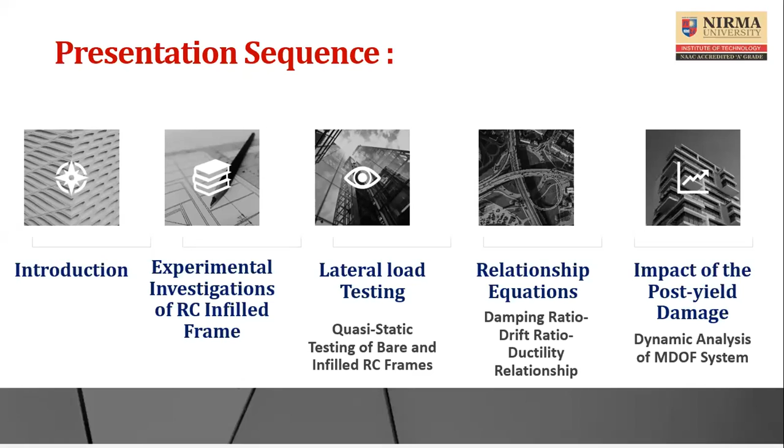And then at last, we will take whatever outcome we have got from this experimental investigation and try to fit it into the dynamic analysis or seismic analysis of a multi-degree of freedom system, wherein I will show you how we have incorporated the various properties or states of the masonry infill, before yield and after yield, and how they affect the overall seismic analysis of any reinforced concrete building.

As we are aware, the structural material most widely used in civil engineering structures, as we see all around, is reinforced concrete buildings. They hold majority of the stake as far as civil engineering construction is concerned, followed by structural steel. Of course, structural steel is still not very pronounced in some sectors of civil engineering construction like official buildings or residential buildings. But most of our stake is probably because of reinforced concrete structures.

And whether it is reinforced concrete or steel structure, worldwide, such kind of framework is later non-integrally built with masonry infills, and that masonry material can be random rubble stone, which is now a little bit obsolete, but still in practice for a very specific purpose, when someone wants to go exclusively for random rubble stone for different reasons. Then there's red clay bricks, which is a very common feature of reinforced concrete typology practiced all across the world.

And recently we have seen variation into masonry infill in terms of AAC blocks as well as fly ash bricks, in order to navigate waste material into a useful form for civil engineering. So fly ash bricks have also come up, and most recently you find that both are being rapidly replaced by AAC blocks. Of course, we will discuss that a little bit later in the discussion.

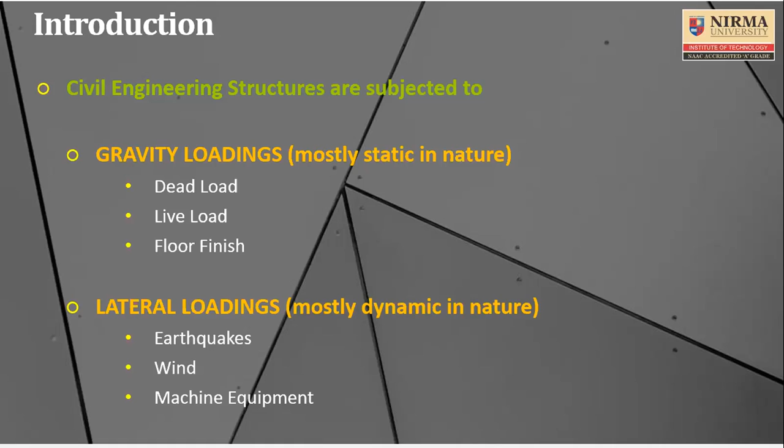Therefore it becomes very important that this lateral loading, which causes a lot of demand on structures, needs to be safely resisted when you construct, design, or analyze any structural system. You need sufficient methods to tackle all such forces, whether gravity or lateral.

As you are aware, in structural engineering we have an envelope of methods to calculate, determine, or assess the performance of any structural system. These can essentially be bifurcated into two: one can analyze and design the structure using analytical methods, and the other, much more important part, on which the analytical method depends, is what we call experimental investigation.

Most of the time we understand the basic behavior of the structural framework system through experimental investigation, and through that we try to develop methods considering either the static form of loading or the dynamic form of loading.

Analytically, we can typically bifurcate any analysis into two parts: static and dynamic analysis. Once you consider the material or structural element to be within the elastic limit, you can call it linear analysis, so it can be linear static or linear dynamic. Once you try to analyze the system with its capacity beyond the limit of elasticity, also called the post-yield region, trying to understand the behavior of any system beyond the yield capability of the material or the structural and geometrical form itself, then it requires non-linear analysis.

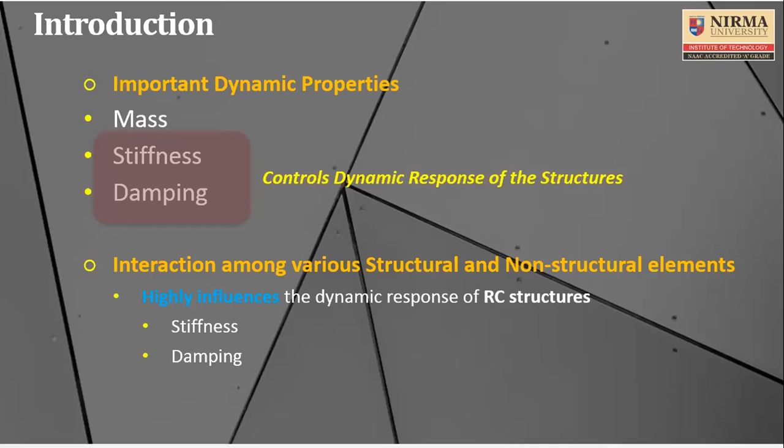The most important parameters responsible for influencing such interactions when you create an infill into the reinforced concrete frame or a steel frame are the stiffness property of that infill, as well as its damping capabilities. Therefore, most of the time we focus our experimental investigations on two important properties highly influencing the behavior of masonry infill on the dynamic response of overall RC infilled structures: stiffness and damping. That is what we are also going to discuss in times to come.

The presence of infill alters the behavior of reinforced concrete frame under lateral loading, because under this lateral loading the infill will undergo different stages. Starting from a low level of lateral loading, it will mostly remain in an undamaged state. When it is in an undamaged state, it will impart a lot of stiffness, as we are going to prove a little later through experimental investigation—undamaged state always offers a maximum stiffness of the infill. Because of that, the lateral load resisting capability of such an infilled reinforced concrete frame is huge as compared to a bare frame where you don't have infill.

Then with the increment in lateral loading, because most of the masonry material that we use is brittle in nature—typically bound by various elements and heterogeneous in nature—despite being connected with a higher bond and higher strength of the binding material, it will try to undergo damage at different degrees.

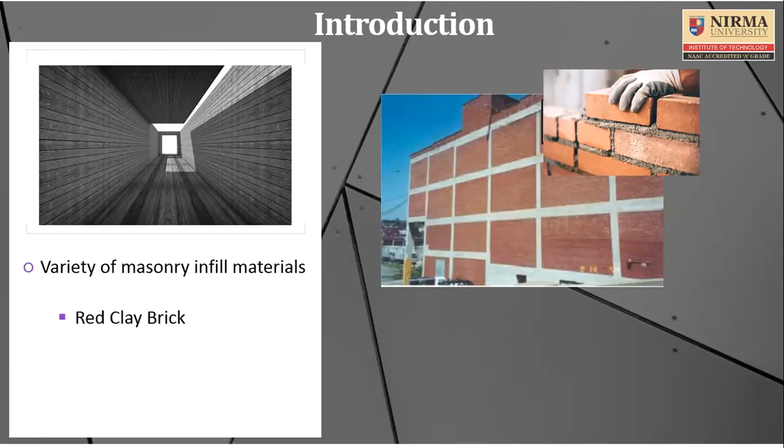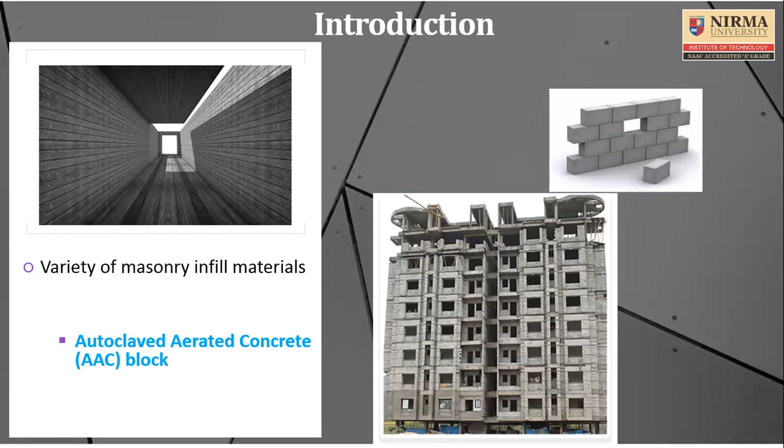Therefore we have been utilizing red clay bricks for centuries together. But now, slowly and gradually, we are steadily replacing red clay brick with a much more lightweight material of a bigger size, which increases the speed of construction by a huge margin—what we call autoclaved aerated concrete blocks, typically known as AAC blocks, which you find nowadays very much in practice.

There is also an alternative to red clay brick, which is called fly ash brick. As you know, India generates huge waste from fly ash through thermal power plants, and there is a lot of concern about disposing of this fly ash. One way to dispose of it is to make bricks out of it.

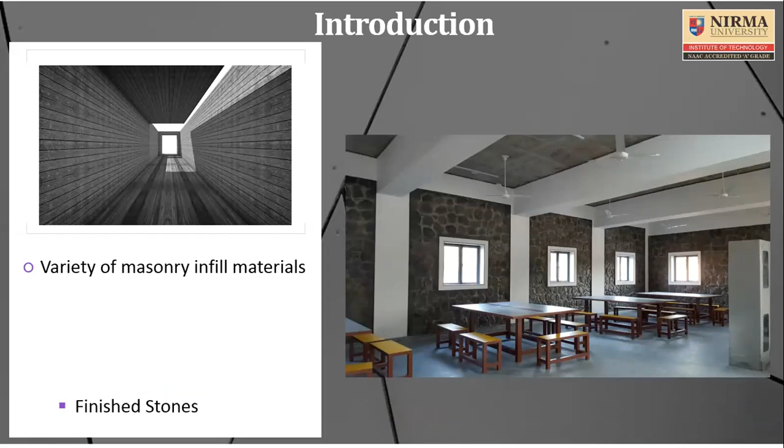The fourth one, which is still in practice but very rare, mostly used from an architectural point of view, is the heaviest dead weight material, which is finished stone. As you can see, it looks very beautiful, but many times this increases the dead weight of the structure by a huge margin, and under lateral loading they are still vulnerable.

Nowadays you will find that this natural stone is also replaced by artificial stone, or other types of stones like marble or other artificial stones, which are still heavy in weight, and therefore they are still used, but of course it has its own demerits in terms of lateral loading.

Therefore you have to understand that when we use such systems in our day-to-day life, one thing is very clear: because of their varied material properties, their behavior under lateral loading is likely to be different, and therefore it becomes a very interesting domain in seismic analysis and design or earthquake engineering, to understand the behavior of such infill and its impact on seismic analysis of the structure.

As you are aware, so far whenever we try to analyze any multi-story building infilled with any type of masonry, most of the time we treat them as within elastic limit, and mostly we employ a modal analysis typically well within elastic limit. Therefore the analysis we take up to carry out or understand and design such RC infilled multi-story buildings is well within an elastic limit.

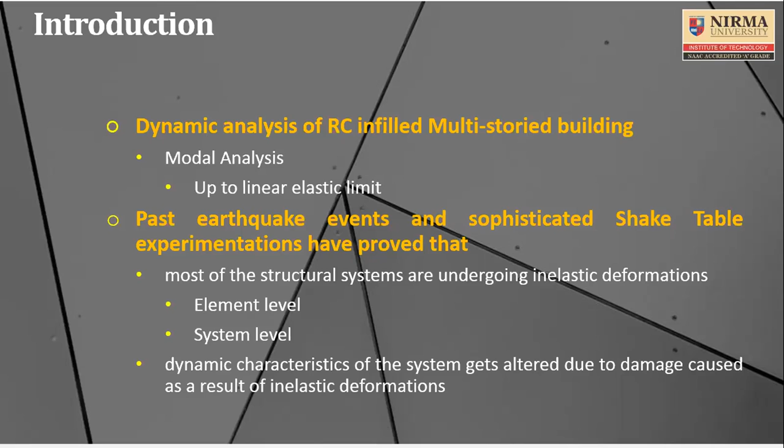As we know, damage always changes the dynamic characteristic of the system, and that dynamic characteristic gets altered immediately when there is damage caused by inelastic deformation. So we must understand the capability of such infills to undergo inelastic deformation, and because of this they are likely to undergo damage, and because they undergo damage, they're likely to change their dynamic characteristic, which will heavily impact the seismic analysis of the structure, and this must be taken into account in our seismic analysis and design.

Therefore it becomes very important, and it has become an active area of research, where we try to understand the impact of various types of infill on a reinforced concrete frame.

In order to understand them better, various research studies have already been conducted, and most of this research has been conducted over more than a decade of time. In fact this area of research has been active for maybe the last two decades, 20 years or so, and out of these 20 years, the last 15 years have been very instrumental as far as these studies are concerned.

The majority of these studies focus on some important parameters, which includes the type of masonry, like the material property - red clay brick has a different material property, fly ash has an altogether different property, and obviously AAC blocks and stone as well.

The construction methodology can also have an effect. So either you build the reinforced frame after putting up the RC infill, or once you create the reinforced concrete framework, you then non-integrally build the infill into the RC frame. So all this construction methodology also has a lot of impact.

In fact, recently some new construction methodology has also been witnessed, wherein people intentionally keep a gap between the infill and the RC frame, in order to safeguard the basic structural element. So that also you are able to see nowadays.

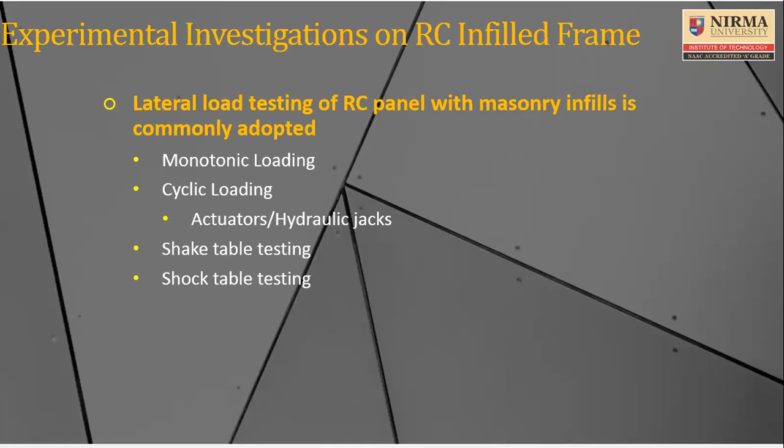Therefore, to simulate this, the most common way of preparing any test specimen is such that the bottom size of the beam is quite huge. But as you can understand looking at the size itself, they are very bulky, and you require very good infrastructure to handle them, and you must handle them very carefully. This becomes an otherwise heavy structure.

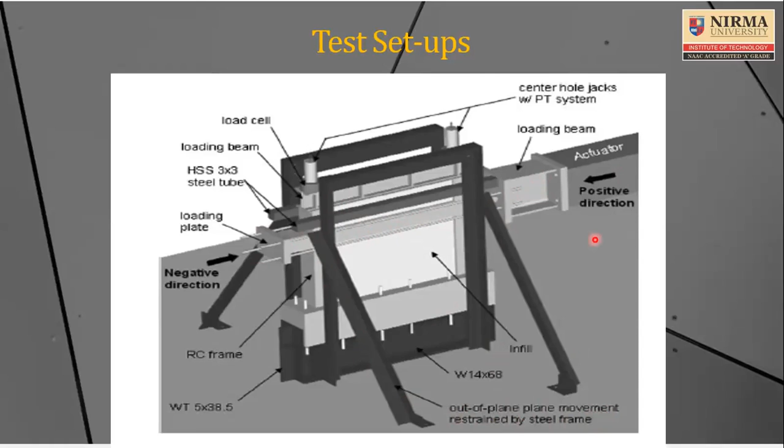As it is a two-dimensional element, when you apply this lateral load, it is likely to undergo out-of-plane movement. To safeguard against out-of-plane failure, you must restrict out-of-plane movement of this RC frame, which can be done by an additional framework. These two inclined supports supporting this horizontal girder restrain the out-of-plane movement using the steel frame. So you have to think of all these things before you go to the laboratory and develop the test specimen.

As you can see, there is a strong ground floor where the base of this test specimen is firmly connected with the strong floor. The load is applied through an actuator, and there are load cells in vertical directions to measure vertical load.

Therefore, you require a pair of strain gauges in the beam as well as column elements. Because this actuator applies reversible loading, at one time these strain gauges may be subjected to tensile stresses, and at other times the same sensor will be subjected to compressive strain. This proves that under lateral loading, the beam or column is subjected to reversible stresses or reversible deformation.

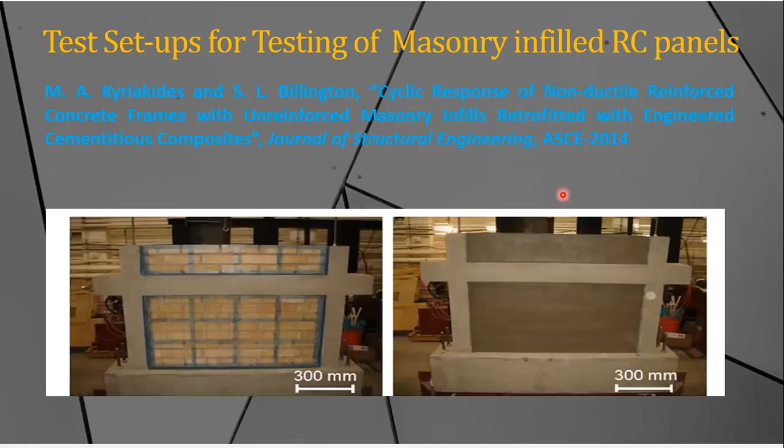This is another work, and as compared to the previous three literatures, this helps understand the fourth important element. As I narrated earlier, these are masonry type or construction methods, and this one is masonry with opening. Ingham and co-authors tested their infill panel with an opening.

To understand the effect of opening on the lateral load behavior of the masonry infill panel, they provided a central opening and different types of openings.

This is one of them, and again the typical test setup is very similar. You can see, in order to understand the pier behavior or rocking behavior of this masonry, because when you have an opening, it is found that the masonry adjoining to the opening is likely to act in a rocking behavior.

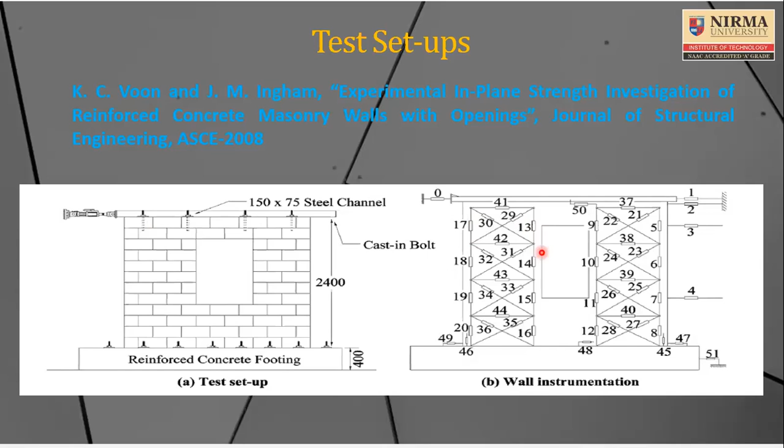In order to capture that rocking behavior, they used a number of diagonal lateral displacement sensors, as well as vertical displacement sensors, so that they can capture the behavior very well. So these are some of the physical ways to understand the behavior.

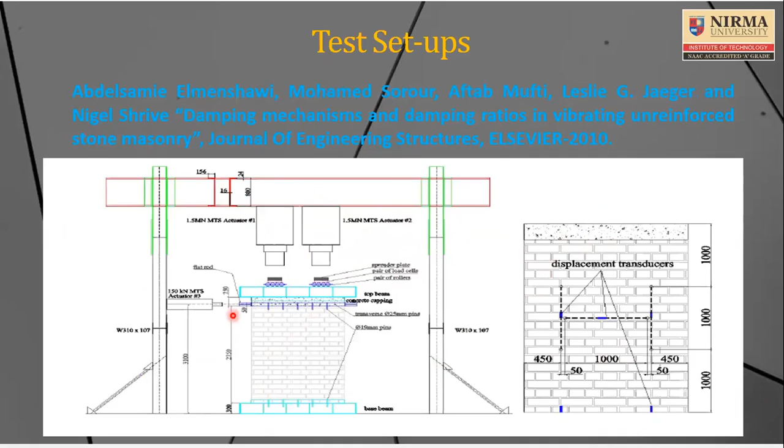But most importantly, while carrying out all such experimentation, we could figure out, as an outcome of that experimentation, that there are different types of failure observed in reinforced concrete infill panels. Some of them are listed here, and these are the very common types of failure observed because of experimental investigation. Because we have observed them experimentally, now we are able to analytically capture them through computer modeling.

Until we carried out this experimental investigation, we could never have understood what kind of behavior or what kind of failure this masonry infill undergoes under lateral loading. Because of that, now we are able to model it with a single diagonal strut or multiple diagonal struts. You can realize from these failures that some of the predominant or typical failures observed under lateral loading are corner crushing.

As you apply the lateral load, one diagonal will try to elongate while the other diagonal gets compressed, and because it is undergoing compression, the effective length of this infill will try to decrease. Because of this reduction in effective length, it tends to undergo corner crushing. In between, it is subjected to diagonal compression, but on the other side it is subjected to tension, and because of that it undergoes diagonal tension. You will find the infill start cracking in terms of a diagonal crack, like a step or step-joint-wise failure, trying to undergo a stepwise failure because of the tension.

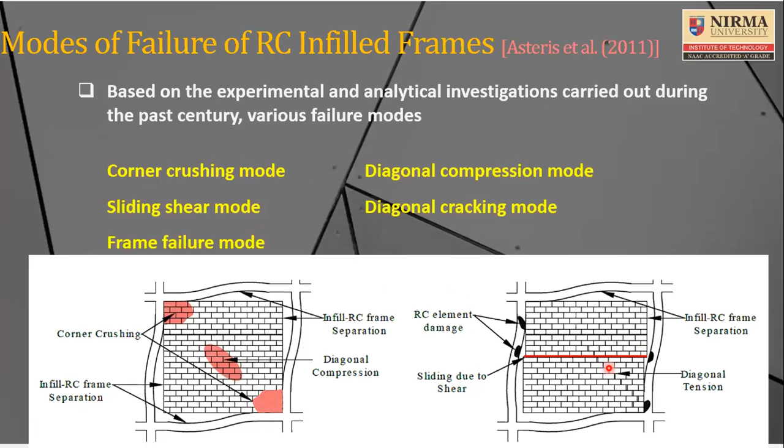As those who have done a course in dynamics and earthquake engineering are aware, all these are part of structural damping, which is very complex in nature. So we try to convert and represent this structural damping in the form of an equivalent viscous damping ratio, using an energy equivalence concept. Then we are more interested in initial stiffness to define the various stages of infill.

As I discussed: undamaged state, damage initiation, and the fully damaged state of the infill. You need to capture the initial stiffness, stiffness degradation, and obviously the ultimate strain, in order to understand the maximum limit of strain for the different types of masonry undergoing strain.

These are the very common physical quantities studied by various researchers worldwide, as you will see through a lot of available literature. These are very common physical quantities that we come across, and we must define each one of them.

Some important definitions are well drafted and available in the literature, mostly given by Park. Park is one of the important references from where you can find some of the definitions I am going to show. As you know, displacement ductility is a non-dimensional ratio of the maximum or ultimate displacement to the yield displacement.

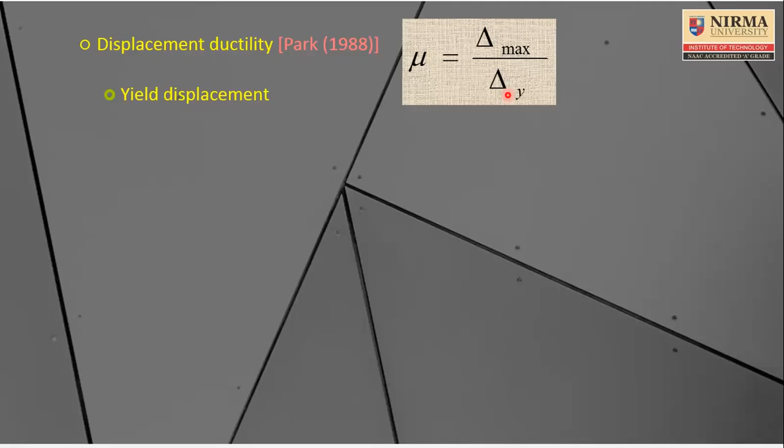But one has to define what is ultimate displacement and what is yield displacement for an experimental investigation's load versus deformation behavior. A number of definitions are available. Based on the first yield, you can define the point where your curve changes its curvature, or where you can see distress or yielding into any element on a load-displacement plot.

That point can be defined as a first yielding point, or it may be defined from elastoplastic behavior of a material. You can calculate the load versus deformation diagram and convert it into an elastoplastic model by treating the initial branch as an inclined linear branch and the post-yield branch as another inclined horizontal line. Therefore it is called a bilinear material model.

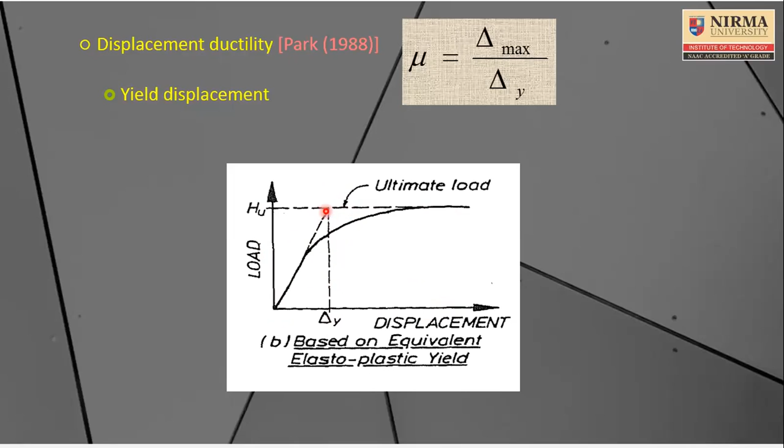Through the bilinear material model, you draw a horizontal line and a vertical line, and the intersection of those lines defines the yield displacement, and the corresponding load defines the yield load. So there is another definition.

There can be a third definition based on energy equivalence on a load-deformation or load-displacement area. You find and draw two lines - one inclined, one horizontal - such that the hatched area here and the hatched area there both have equal energy, which can be built from integration or a numerical integration method you are familiar with.

So you perform a numerical integration and calculate the energy or area confined by this inclined line, and the area confined between the curve and the horizontal line, and by equating them you find the yield displacement at the corresponding yield load or ultimate load.

You can also define the yield displacement based on the reduced stiffness equivalent elastoplastic material. Again it is a bilinear plot wherein you calculate the ultimate load. A horizontal line is drawn at the ultimate load, and the inclined line joining the initial stiffness or linear phase, and the intersection defines delta y.

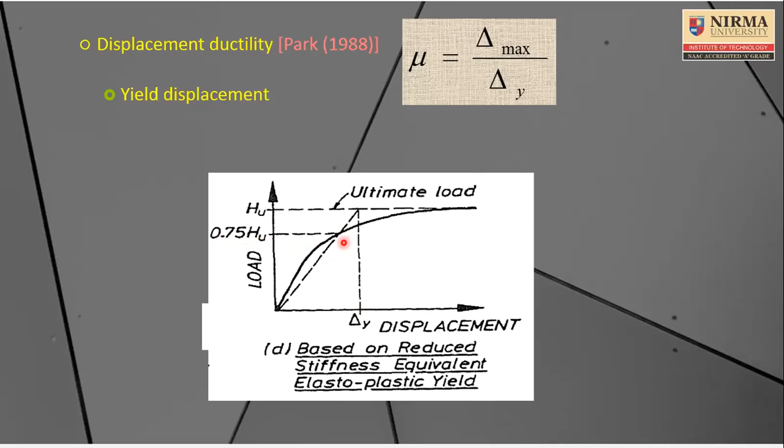But you reduce that ultimate load by 25%, reducing the capacity based on its factor of safety, and from there you can calculate the yield force and the corresponding yield displacement. All these definitions are given by Park in 1988.

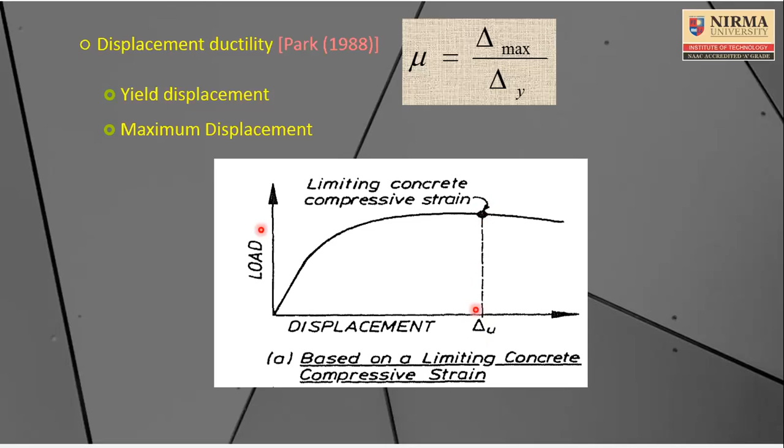Similarly, you have to define a maximum displacement, and there are again a number of definitions available. Based on the limiting concrete compressive strain, when the strain in concrete reaches its well-defined strain limit by various experimentation and code definitions, at that point you can define the corresponding line as delta U, and the corresponding load as the ultimate load and ultimate displacement. So that is based on limiting concrete compressive strain.

One can also define it based on the availability of significant load capacity after peak load. Once you reach a peak, and still after that, the load reduces but only by a small amount, maybe 10%, 15%, or 20%, which is mostly used. If the load reduces by just 10 to 20%, up to that point you can say it still has very good strength available, and that ultimate load and corresponding displacement can also be defined as ultimate displacement.

Ultimate displacement can also be defined based on fracture or buckling of the reinforcement. Under lateral loading, the core concrete gets fractured, and the vertical reinforcement may also be subjected to buckling. When you plot the load versus deformation diagram, after the ultimate load you find a sudden decrement in load because of multiple damage occurring in the concrete as well as the reinforcement, sometimes showing a step-like sudden decrement due to simultaneous damage in the RC infill and the reinforced concrete element.

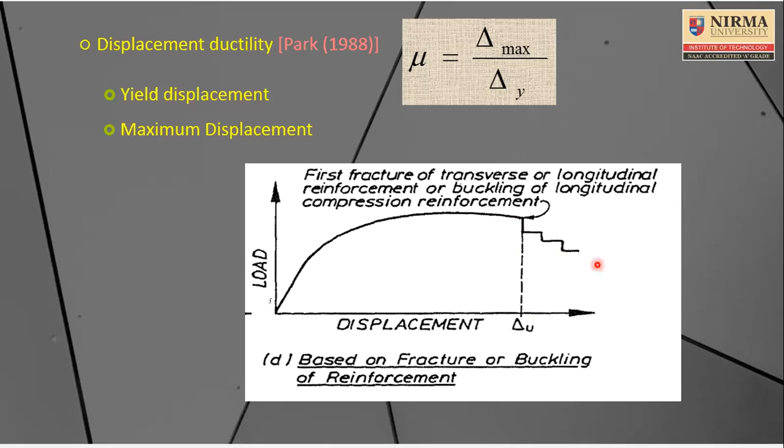On the first reduction or first damage itself, you can treat that as the ultimate displacement and disregard all displacements after that. That is another way. Another approach is to calculate the peak load, and that corresponding displacement itself can be considered as the maximum displacement. So these are various ways to obtain displacement ductility based on the definitions of delta max and delta y.

Similarly, you can also calculate the equivalent damping ratio based on the standardized form of energy dissipation of the cycle.

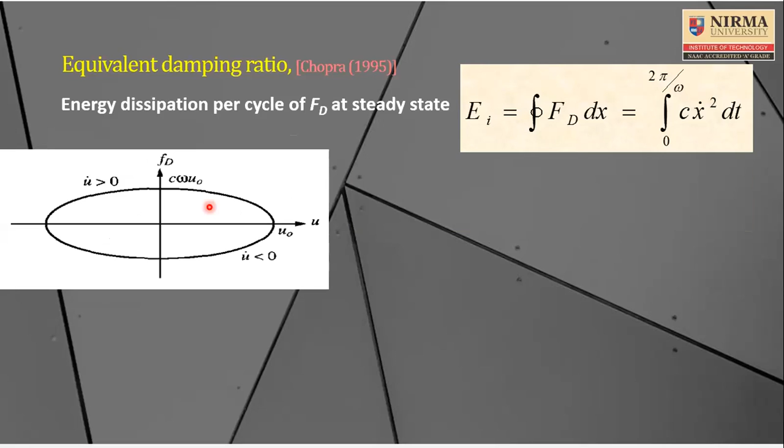As you know, if you subject a structural element to sinusoidal loading, you calculate the total energy lost in one cycle by integrating and calculating the area between the load versus deformation plot. You then equate that plot with any other hysteresis loop available for your material, like masonry infill, red clay brick, AAC block, fly ash, or other materials. So now you have a non-regular hysteresis loop, and you calculate the energy dissipated in one cycle using a numerical integration method. You equate that with a sinusoidal curve where you apply a harmonic periodic load to the element, converting it into an equivalent load by equating the energy of a typical hysteresis loop with an equivalent damping ratio or equivalent viscous damping nature, as shown in the mathematics here.

The most important parameter here is omega by omega n. There is always some forcing frequency, and the system has its own natural frequency. So in order to establish this energy, we always treat this omega by omega n ratio as equal to 1, meaning you consider the frequency as a resonating frequency. This is a very important assumption in establishing the equivalent damping ratio.

Of course, many researchers have their own reservations about using this omega by omega n ratio. Various literature and research, including my own student's work, show that these assumptions prevail because up to certain values of frequency ratio, there is not much difference in the energy loss. Therefore you can consider the hysteresis loop as equated with an elliptical loop of viscous damping at resonating frequency, allowing you to calculate the damping coefficient using a simple equation: 1 upon 4 pi, a constant, times Ed by Eso, where Ed is the energy dissipated in a real experimental setup made from whatever material, and Eso is the corresponding energy dissipated by a viscous damper. This allows you to calculate the equivalent viscous damping ratio.

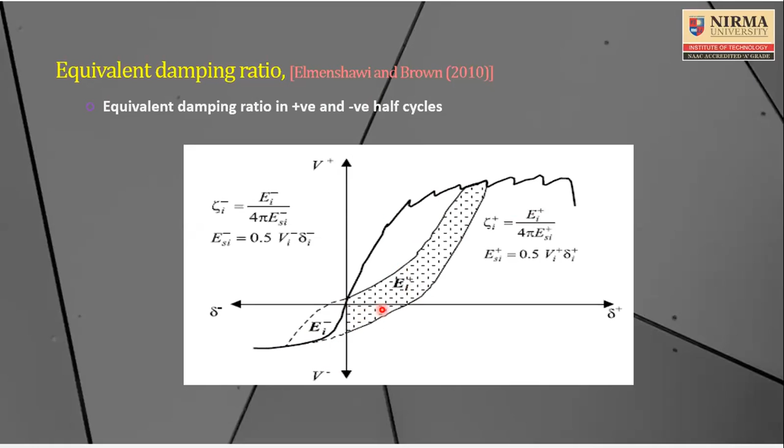Many researchers have their own reservations, so they have also carried out research based on the forward cycle as well as the backward cycle, which is generally unsymmetrical. There is good research by Elmenshawi and Brown in 2010, where they considered and separated the positive cycle and negative cycle independently, trying to figure out if there is any difference in the equivalent damping ratio. Their study suggests there is not much difference in the equivalent damping ratio, but it is always unsymmetrical.

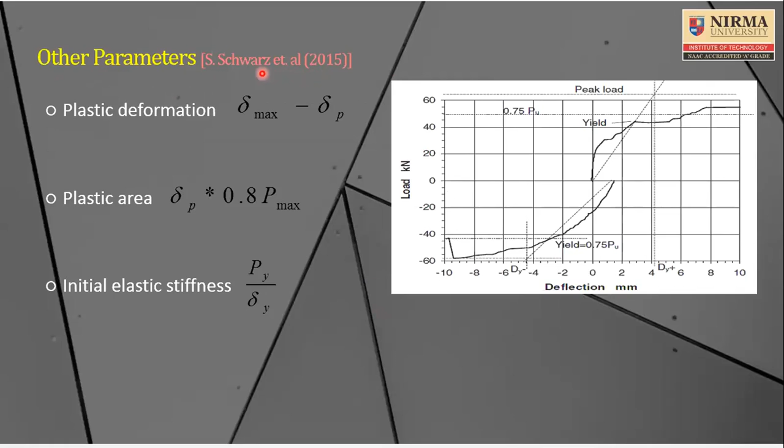Based on that, in 2015, Schwarz et al. also carried out experimentation with the AAC block, and they defined the plastic deformation, plastic area, and initial elastic stiffness, but I won't go into detail on that.

Let me quickly take you through, within 10-15 minutes, what our own experience was when we carried out this experimental work at our own Nirma University.

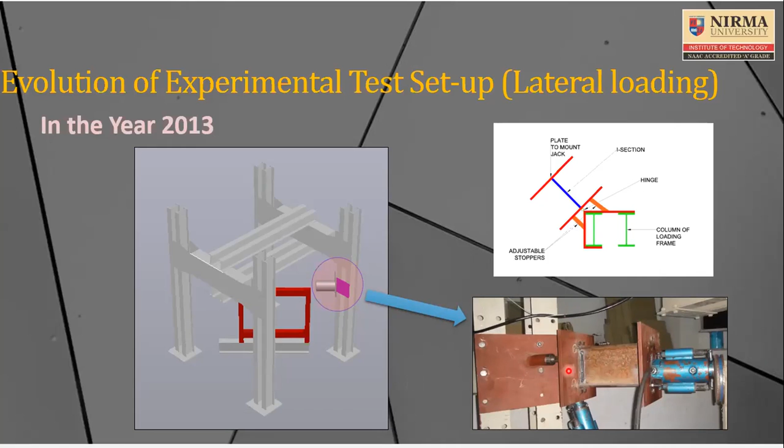For the first time in 2013, we attempted to apply lateral loading on an RC frame with infill or without infill, using the existing setup of a loading frame. We had an existing 100 kilonewton loading frame, and using one of the columns, we fabricated an assembly to apply the lateral loading, as you can see from this picture. That was our first attempt with one of my MTech students. My MTech student fabricated this entire setup to apply the lateral loading, and it worked very well, but being a first experience, it also had its own limitations, and we learned many things from it.

My student Sanjay Sharma carried out his dissertation work for one year on such a bare frame and a frame with red clay infill, applying lateral loading on a one-third scale specimen.

We used a hydraulic jack to apply the lateral loading. This was monotonic loading, and we measured lateral displacement at various sections. We fabricated an assembly to apply the lateral loading and provide fixity in terms of the shoes.

We faced some problems while applying this lateral loading. When you apply lateral loading, there are always vertical reactions: one reaction upward, another downward. This downward reaction is very difficult to hold, so instead of just resting the specimen, you have to hold it down on that side, since the lateral load is applied from there. Holding the downward reaction is a very challenging task.

We learned from that and modified our setup with a dedicated facility: a strong floor with lateral load capabilities. We came up with a dedicated strong floor facility in 2015, where a couple of my students worked on this—Janil, and also Harshit Kothari, who was instrumental in carrying out similar work. Both students were responsible for developing the strong floor and this facility.

Between 2013 and 2015, we came up with a sophisticated hydraulic jack, force transducer, data acquisition system, strain gauges and other instrumentation. My student developed a fully sophisticated experimental setup with a rigid floor and lateral load frame, hydraulic jack, load cells, accelerometers, data acquisition system, a sophisticated computer system, LVDTs to measure displacement, and specialized shoes to hold down the reaction.

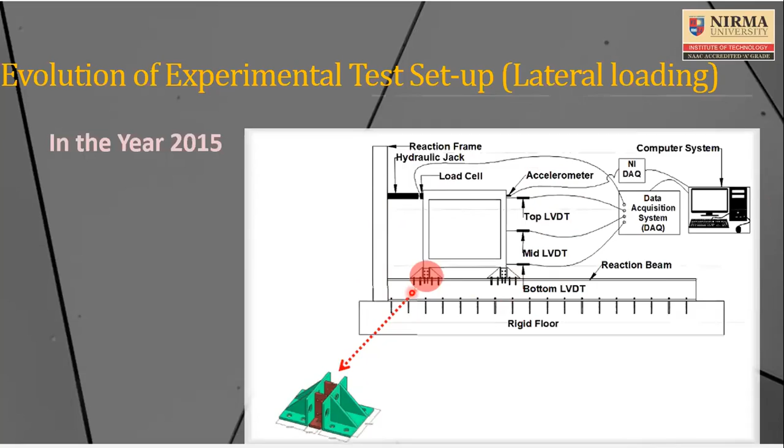This is the rigid floor facility, where we again used an existing setup to apply lateral load. We used the vertical frame available from our shake table facility, which is a very unique facility in our laboratory, to apply the lateral load. These are some of the instrumentation used.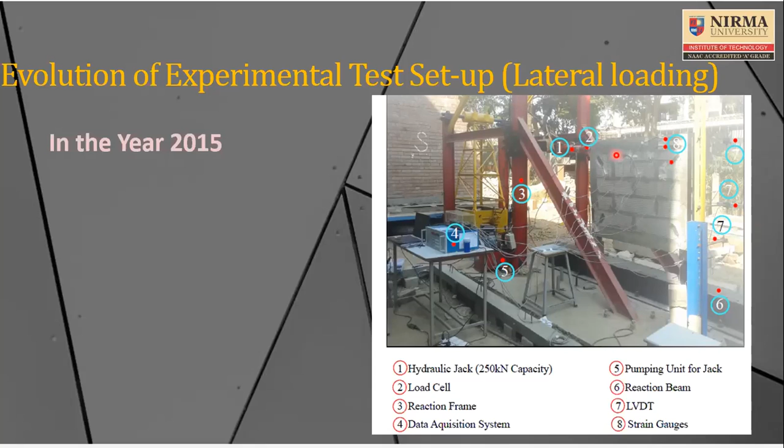With this setup we could better perform experiments on infilled panels—RC panels with and without infill. We call one the bare panel and the other the infilled panel, and we tested both under lateral loading. This is the photograph of the instrumentation used.

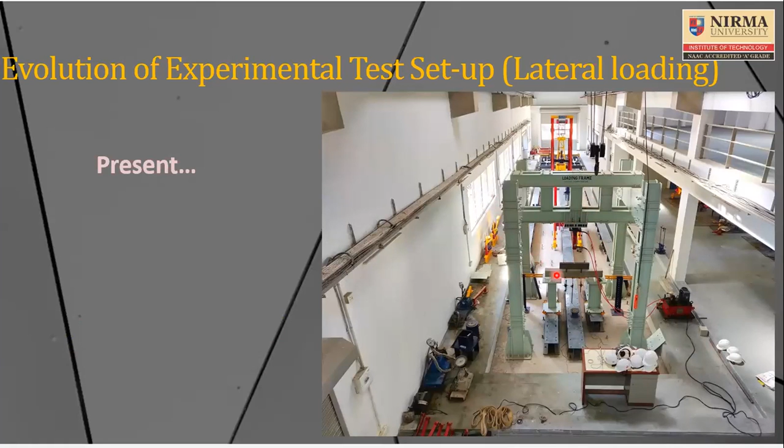Presently we have much more sophisticated facilities. This is the old setup, and here is the new setup with much better strong floor facilities, including a lot of capability for strong floor and vertical loading, and now a dedicated A-frame to apply lateral loading.

Recently we also carried out lateral load testing on a precast portal frame, a different kind of portal frame developed by our own MTech student, testing it in a much more sophisticated way. We designed this system so that it does not undergo out-of-plane movement, so we don't require any additional facility to prevent out-of-plane loading.

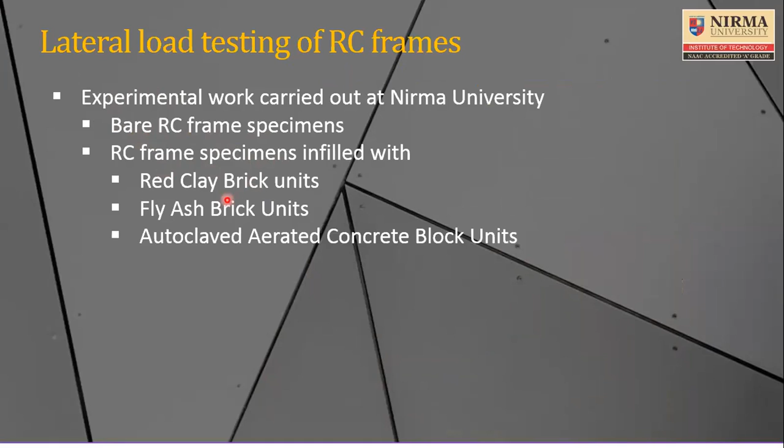These are some of the tests I will carry forward with you, work done by my PhD student. We carried out extensive experimental work with a bare RC frame specimen and RC frame specimens with red clay, fly ash, and autoclaved aerated block infill.

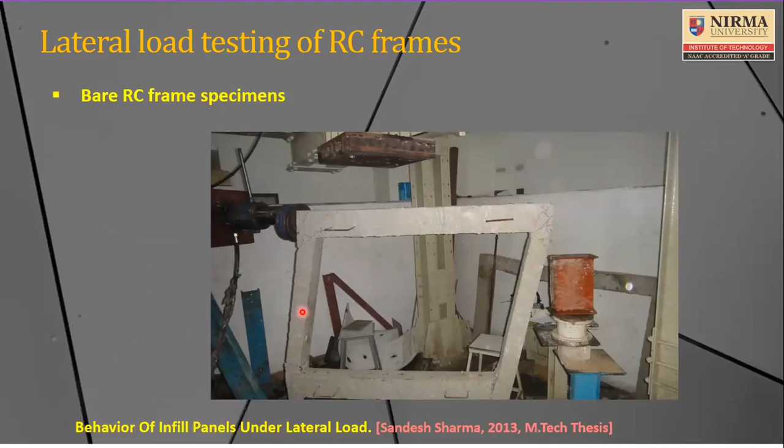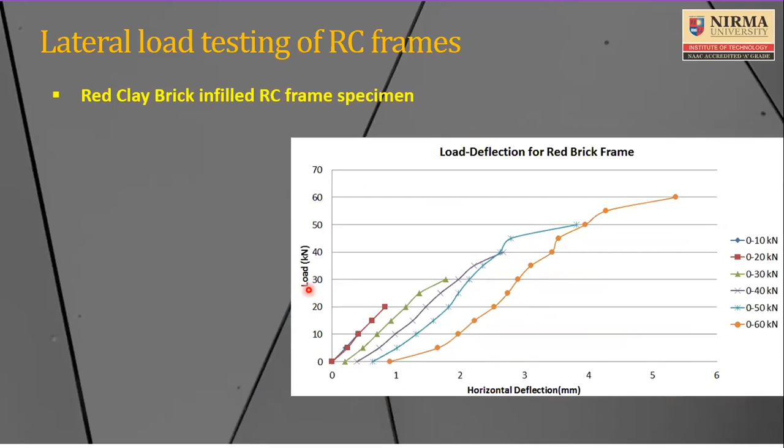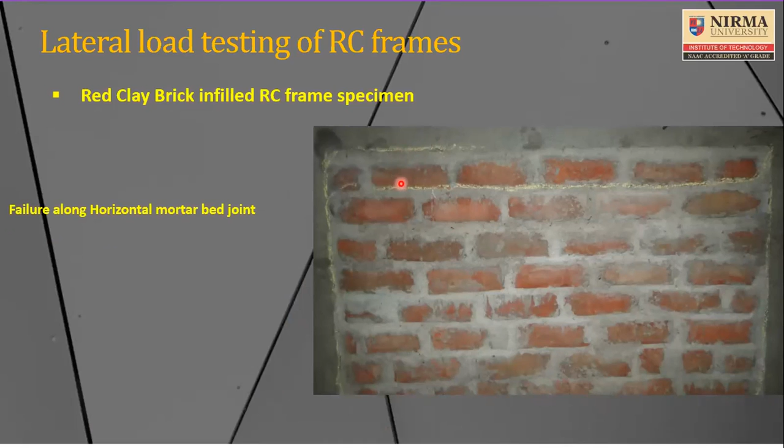As you will be able to see, there are some cracks throughout the bed joint, and you will be able to see some vertical opening of the infill separation. So here you will see such kind of thing in a red clay brick, because red clay brick has very good properties, very good compressive strength, and their modulus of elasticity is of course very less as compared to RC frame. But they have very good compressive strength in terms of the reinforced concrete element, and therefore it is undergoing horizontal bed joint failure and vertical separation of the frame along the bed joint. You can also see some step-type failure observed in the red clay frame.

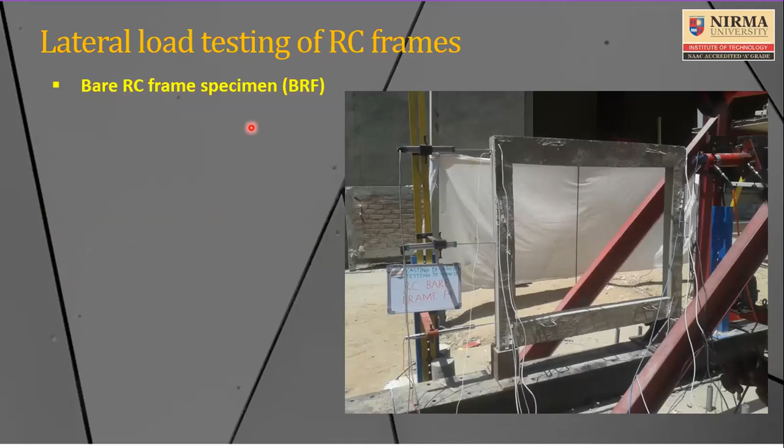Then, in a more sophisticated way, we performed tests on the bare frame along with different types of infill. We once again performed a bare RC frame specimen, and then infilled such RC bare frames with different types of infills like fly ash based and AAC block based. This work was done by my MTech student, and then further by my PhD student. These are some of the photographs, with different cycles applied.

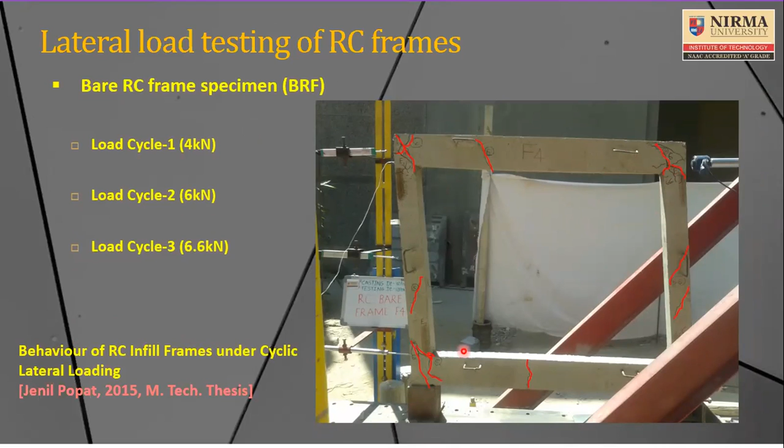You can see the kind of failure observed in the bare RC frame because of flexural action, and the column is undergoing tension and compression. The beam is also undergoing tension and compression, and some shear failure can also be seen. This is the cycle by cycle lateral load versus displacement plot.

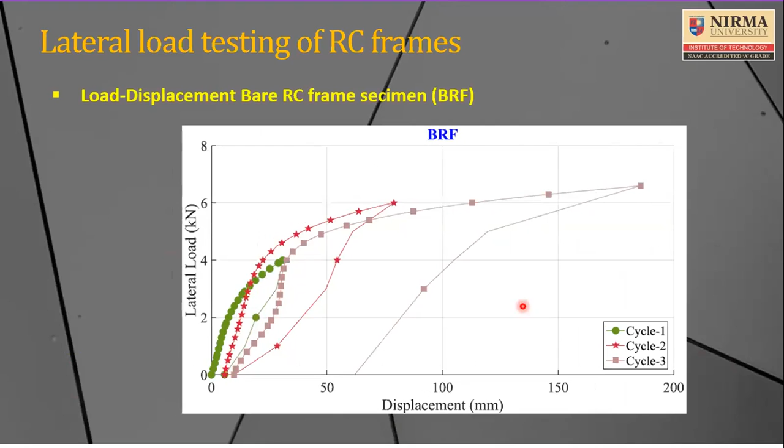Of course, it is a monotonic half-cycle loading, so it does not go on the other side. This is the back path, because we do not have a very well controlled backward unloading path, so we have removed that unloading part and relied on the forward path of the loading.

Then we calculated all the important parameters like maximum loading, yield displacement, maximum displacement, residual displacement, displacement ductility cycle by cycle and envelope for envelope, as well as elastic energy, strain energy due to energy dissipation, equivalent damping ratio, drift ratio, and initial stiffness and second stiffness to calculate the stiffness degradation.

You can find that the bare frame has a displacement ductility of the order of 1.5 for the first cycle, and it keeps increasing; the overall displacement ductility is good, 9.04. Similarly, the zeta value keeps increasing from around 8% to 15%, and delta max by h, that is drift, also keeps increasing as you keep applying the load horizontally.

But most important, it has good initial stiffness. If you look at the previous one, the stiffness was very low, around 1.46, but here you can see the stiffness is very large. So the masonry infill has definitely improved the stiffness.

There is another, we have conducted two test specimens. We have prepared two specimens of AAC block and fly ash brick, and again you will see a similar kind of pattern for another test specimen. Again, a load displacement plot you can see, and the result shows there is a huge improvement in the stiffness.

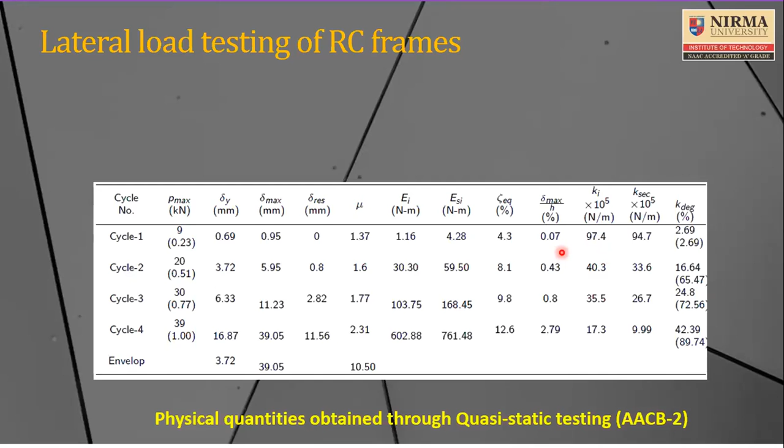So a masonry infill provides very good initial stiffness. When it is in an undamaged state, it is not wise to omit the contribution of this infill. Despite AAC block having much less compressive strength compared to red clay brick or fly ash brick, they provide very good in-plane stiffness when subjected to lateral loading, and it's not a good idea not to consider this into the analysis.

So the lateral load is very well resisted by the infill. In fact, infill attracts a lot of lateral load, and once its capacity gets exhausted, the frame itself starts taking the load, and then that also undergoes damage.

This is the load versus deformation plot, and again you can see it has very good displacement capacity. The fly ash based test specimen also has very good displacement capability. Of course it reduced the drift by a large margin, but the stiffness is not as good as the AAC block infill.

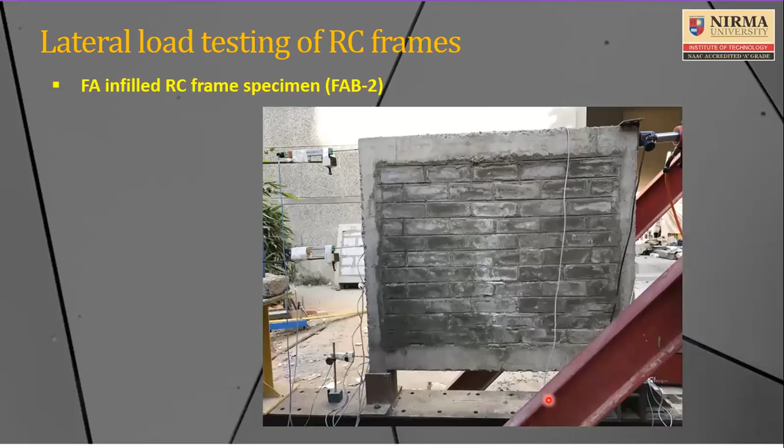As you can see, the degradation is also huge after a certain amount of lateral load application. There is another specimen, and again you'll find a very similar kind of failure: complete bed joint failure, through-brick failure, and vertical joint separation under lateral loading.

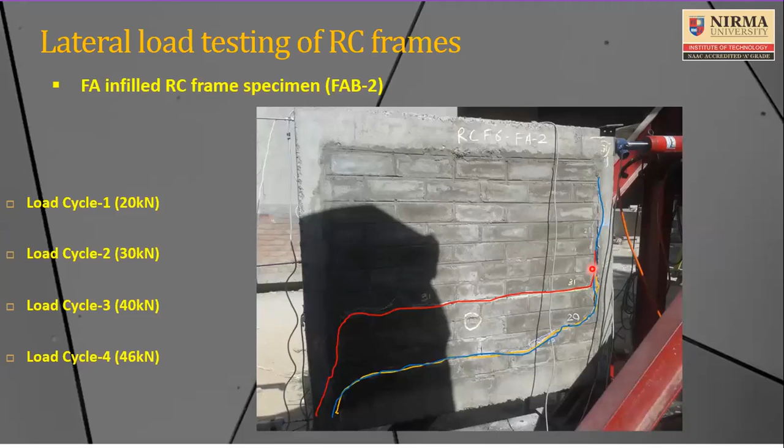So all those typical failures that we studied from various other literature have also been captured in our own experimental setup. This is load versus deformation cycle by cycle, and these are the various response parameters we obtained from the experimentation: percentage drift, percentage reduction in infill stiffness, and equivalent damping ratio.

So you can see the original damping ratio is almost 3 to 4%, but with damage it progresses up to 11% or 12%, which we never consider in our analysis.

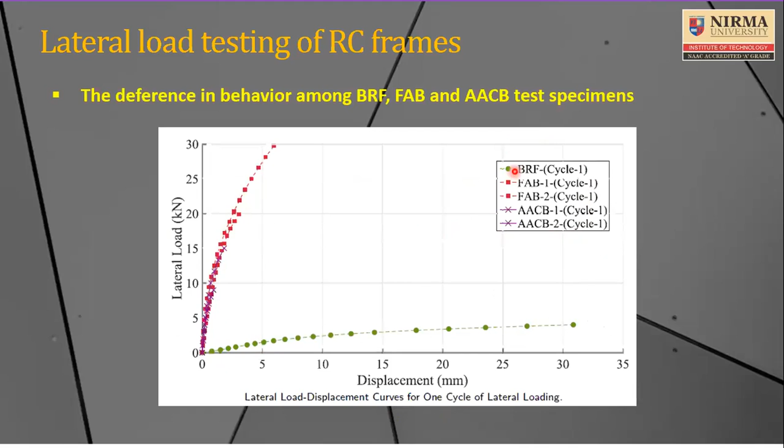This plot is very important, which we have compared only for the first cycle. From this you can understand that a bare frame infill has a very low lateral load carrying capacity, but as you can see, both fly ash and AAC block have very good capacity to resist the lateral load.

These are some important outputs which I won't read in detail, but just to show that fly ash brick and AAC block based RC infill panels take almost 7.39 times and 5.76 times higher lateral load compared to bare frame. The ductility capability is also about 20% higher, and displacement capacity of fly ash brick is about 1.78 times higher than AAC block based RC panel.

So one can understand that both types of masonry infill are good compared to bare frame, and we must consider their lateral load capacity in seismic analysis. But the displacement ductility, to our surprise, comes out a little better for fly ash brick compared to AAC block, while the damping capability of AAC block is better than fly ash brick.

So that we were also able to see. The AAC block test specimen gives higher energy dissipation versus the fly ash brick test specimen, which gives the AAC block specimen higher performance compared to fly ash or even red clay brick. Based on that, we understand that not only stiffness is important, but damping also plays a very important role in seismic analysis.

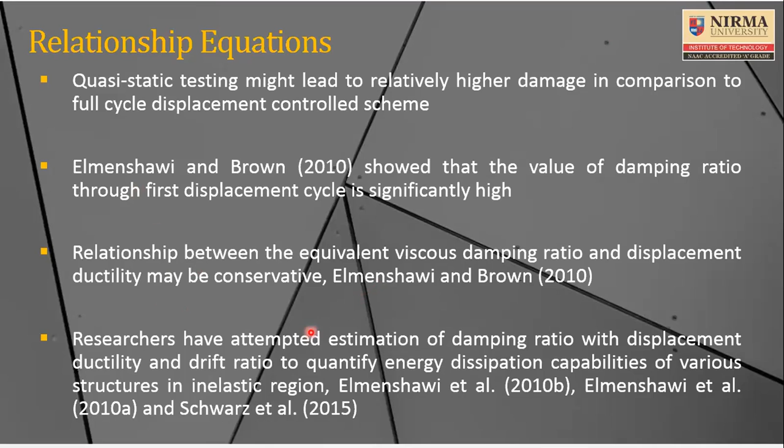So we have also developed some empirical equations based on our quasi-static testing, and such empirical equations have also been obtained by Elmenshawi and his colleagues, as well as other researchers. Based on that, we have developed relationships between equivalent damping ratio and displacement ductility, and equivalent damping ratio and drift ratio. So once we know the drift ratio, I can estimate the equivalent damping ratio, and similarly, if I know the displacement ductility, I can also calculate the equivalent damping ratio.

Once I know the equivalent damping ratio, I can computationally carry out the seismic analysis by writing either a computer program or using software. So now what we have done is solved the problem of a reinforced concrete building with input from our quasi-static testing, and we have modeled the post-yield behavior of the infill masonry, reducing the stiffness as well as altering the energy dissipation of the multi-story building.

It is very important to see that post-yield inelastic deformation always leads to reduction in stiffness and change in the energy dissipation mechanism, as we have seen earlier. Therefore we decided to carry out seismic analysis considering this post-yield aspect in our seismic design. Otherwise, we learn from the literature that mostly linear dynamic analysis is done with constant stiffness and damping matrices, and mostly Rayleigh damping is widely used with a constant value across different modes of vibration. Various research studies suggest that careful consideration of the damping matrix is required in such analysis, which has never been done in day-to-day practice.

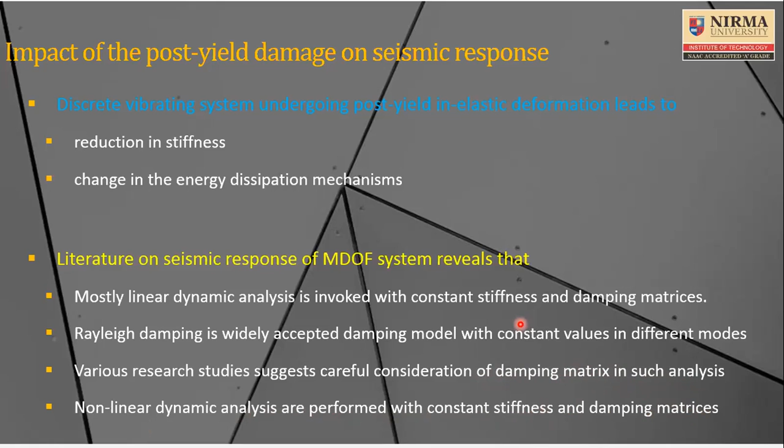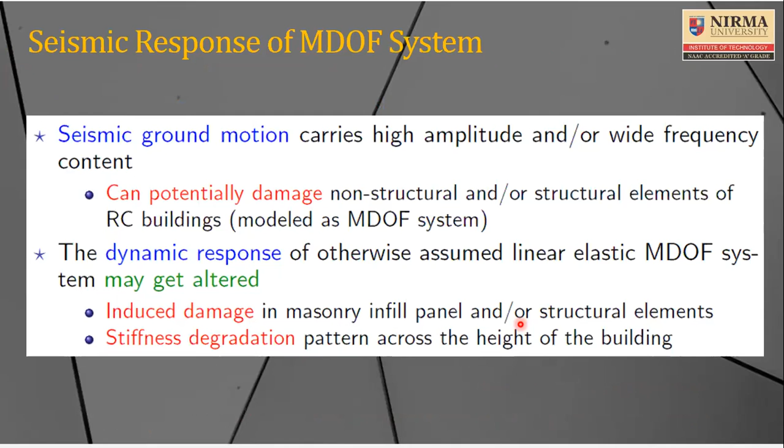Non-linear dynamic analyses are performed with constant stiffness and damping matrices, but as we see from experimentation, the stiffness also changes and damping also alters, which we never carry out in our day-to-day analysis. Therefore, we decided to carry out seismic response analysis of an MDOF system with induced damage in the masonry infill, subjected to decrement in stiffness as well as energy dissipation. So we have carried out the seismic analysis of a G plus 5-story reinforced concrete building, both without considering the contribution of infill and with consideration of the infill.

We have used the average acceleration Newmark beta integration method. One can understand that when we don't consider any damage into the infill, it means a constant stiffness and constant damping case, so we carry out linear dynamic analysis. But once we consider post-yield damage into the infill or frame, the stiffness has to change, damping also has to change, and therefore we must involve non-linear dynamic analysis, and that is what we have done. We modeled this post-yield damage based on drift ratio to stiffness degradation, and based on the damping ratio with drift ratio relations that we obtained from our analysis.

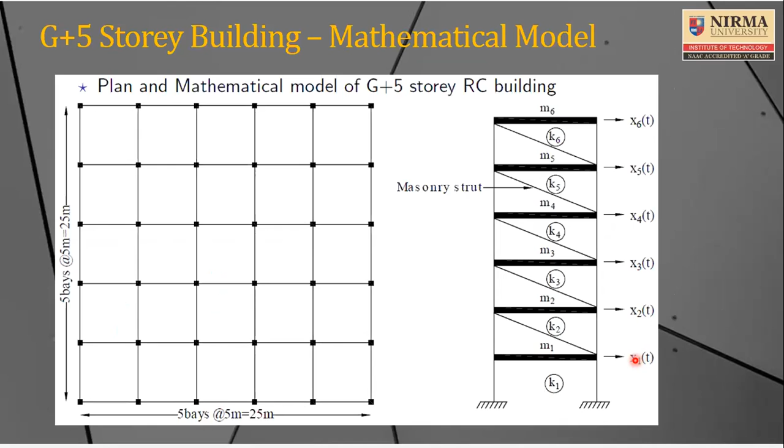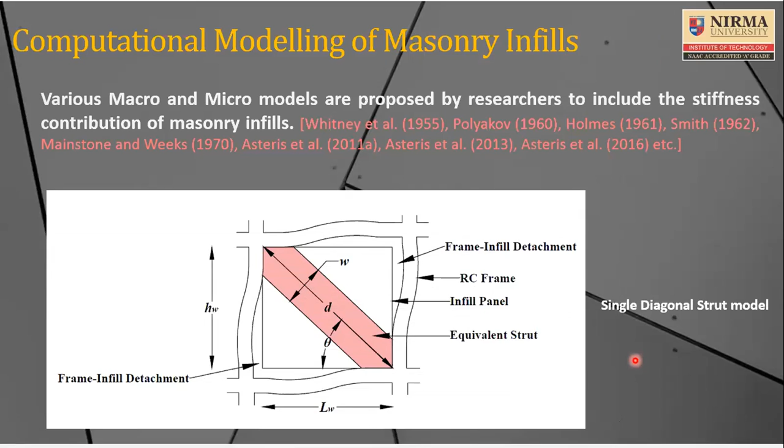Then, because we considered the building with infill, we had to model the infill. As I mentioned earlier, various researchers have proposed different types of computational modeling, including single diagonal, two diagonal strut, or multi diagonal strut models. Some important contributions include those by Whitney, Holmes, as well as Asteris—a very important contribution—and Smith, etc. That is what we had to also include in our analysis.

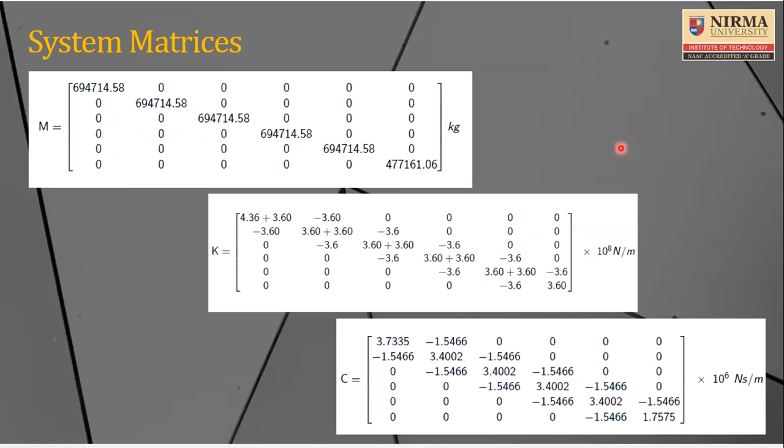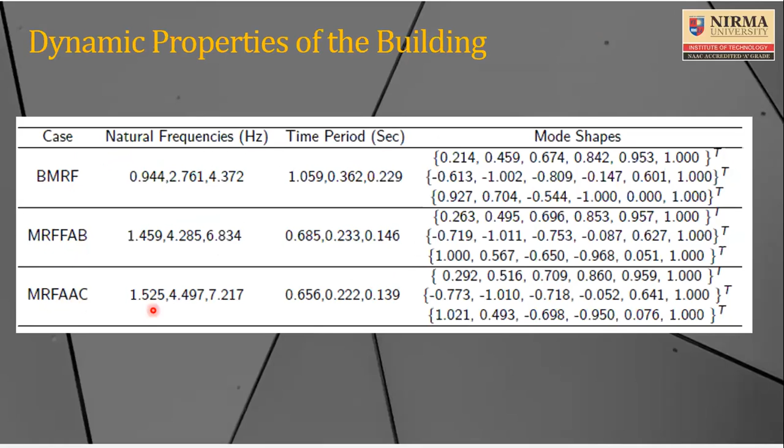And these are the time history analysis with their PGA values, and these are the system matrices, and these are the dynamic properties of the building with their natural first three modes, natural frequencies, time period, and the mode shapes that we have calculated for each one of the cases: BMRF meaning bare moment resisting frame, MRF with fly ash brick, and MRF with AAC block. We have carried out the free vibration analysis and got these properties.

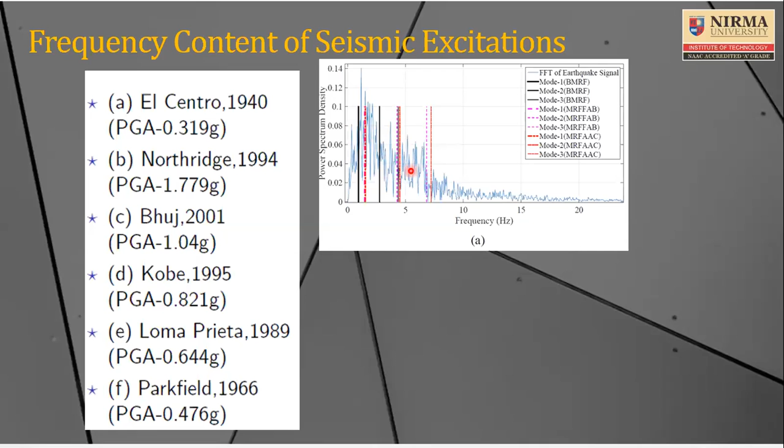We also checked whether our system is really excited by the considered seismic excitations. So we carried out a Fast Fourier Transform analysis, and from there you can understand that the first three modes are excited by almost all time history analyses. So all time history analyses are capable of exciting the first three modes of the building, and therefore our choice of seismic excitation is good enough.

Then we carried out two approaches to quantify post-yield damage. Approach one, wherein we changed the global stiffness matrix of the RC building when the drift ratio exceeds the threshold value derived from quasi-static testing. In the second approach, we changed the global Rayleigh damping matrix as soon as the drift ratio exceeds 2% at any story level, as defined in most seismic codes across various guidelines like FEMA or ATC 40, or the seismic guidelines like UBC and other countries' codes.

Of course, in our own code this limit is very low. So we have not considered the limit given in the Indian code, which is very, very low compared to other international codes. We have gone with the other international codes, which are more realistic, and different types of load cases are considered.

I'm sorry that because of the paucity of time, I'm not going into detail of each one of them. But we have changed the stiffness matrices and we have also changed the damping matrices. As you're aware, since we assumed Rayleigh damping, the Rayleigh damping itself depends on the stiffness matrices, and if the stiffness matrix changes, the Rayleigh damping also changes. So in some cases we considered a constant value, and in others we considered the damping modified with the change in dynamic properties due to the change in stiffness matrix. So all these intriguing cases have been considered to more realistically model the post-yield damage.

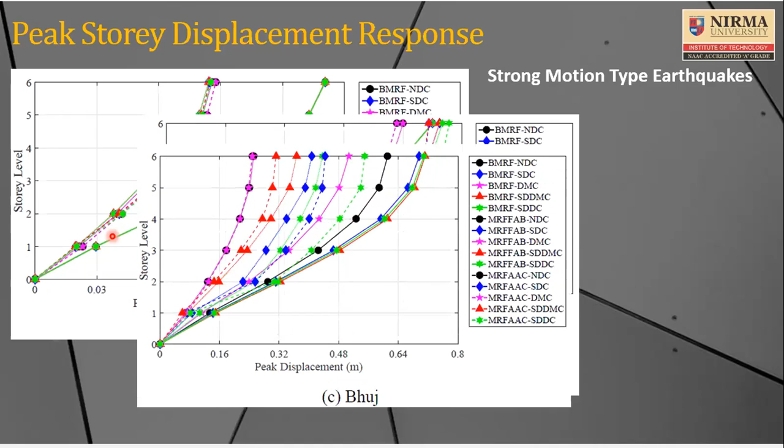So we considered the peak story displacement response. As you can see, compared to the bare frame, because of the addition of infill, whether fly ash or AAC, both improve the stiffness property, so the displacement response reduces largely. But as you can see, with some change in stiffness, every time you don't find that the displacement of the frame always reduces — in some cases you will find they go beyond the value.

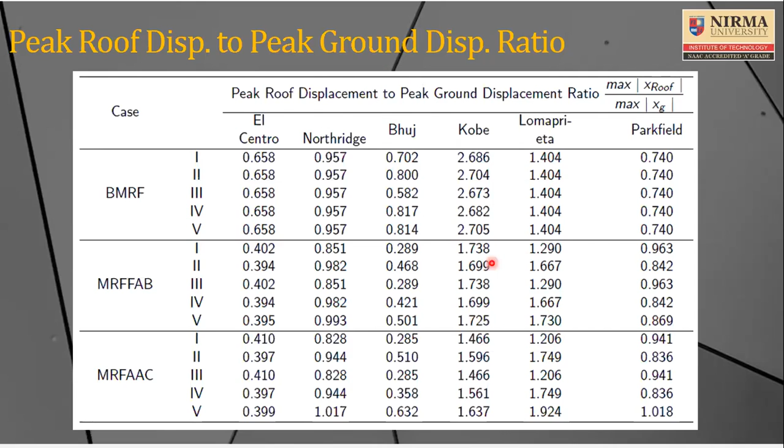And these are some non-dimensional parameters that have been obtained, where you can find that for all these frames, generally the maximum peak displacement at roof (X roof) is less than the peak ground motion, except for Kobe and Loma Prieta, which are pulse-type ground motions that are very dangerous. So pulse-type earthquakes cause much more demand, as you can see from this table. And similarly, we have calculated the inter-story drift ratio.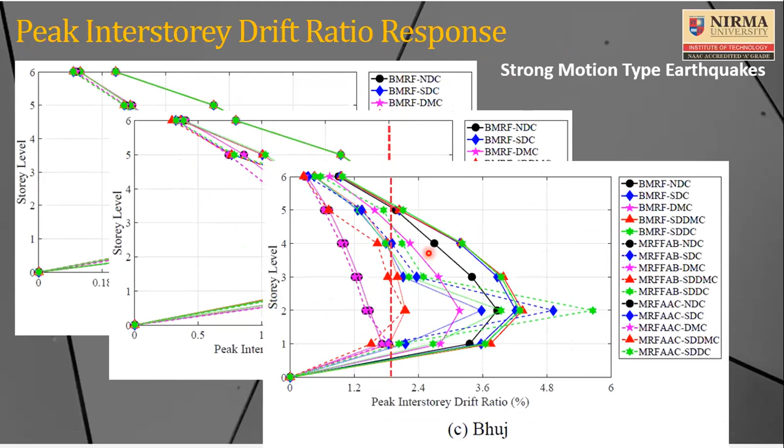This vertical line is a 2% limit, and you will find that this 2% limit is exceeded when you consider the decrease in the stiffness matrix, or when you try to change the damping modification. So all such cases will take the interstory drift beyond the permissible limit. As you can see in the third case, like the Bhuj earthquake, it is hugely exceeding this limit, so there is a cause of concern.

All this dynamic analysis shows that our linear dynamic analysis is not sufficient, and we must be very careful considering the effect of the infills. The same way, stiffness degradation, as you can see for strong ground motion as well as for a pulse type of ground motion, is exceeding way beyond the non-damage case, and therefore they are very, very important.

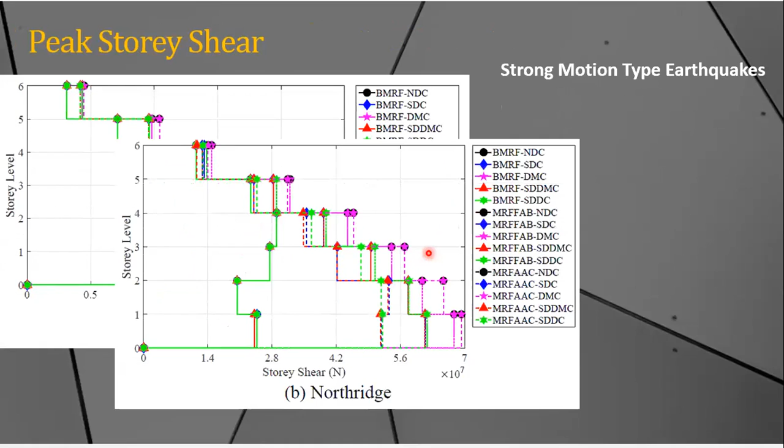The peak story shear, or base shear, is also increasing, as you will be able to see at the bottom with the different kinds of cases that we have considered. We have also calculated a normalized value in terms of the shear, base shear to weight. And these are very, very important conclusions.

So a few important conclusions. Of course, there are much more detailed conclusions, but I am summarizing the very important ones which may be important for this discussion: peak displacement and peak interstory drift of infill RC building is substantially lower compared to a bare RC frame, and therefore we must consider the contribution of infill in seismic analysis.

In many cases, the peak story displacement and peak interstory drift of infill RC building show higher values compared to bare RC building once damage has occurred. So once damage occurs, the building will typically try to behave like a bare frame, and that is already known. In fact, when we consider out-of-plane failure of the infill, you can typically define it as a bare frame.

And therefore, in practice, many people carry out the analysis like a bare frame. They don't consider the contribution of infill, but the lateral load capacity of the infill panel is much higher, so you must consider it.

And then you can also consider the damage introduced because of the higher input from the seismic ground motion. Under pulse-type seismic excitation, there is a substantial amplification in peak roof displacement and peak roof acceleration, both with respect to peak ground displacement and peak ground acceleration.

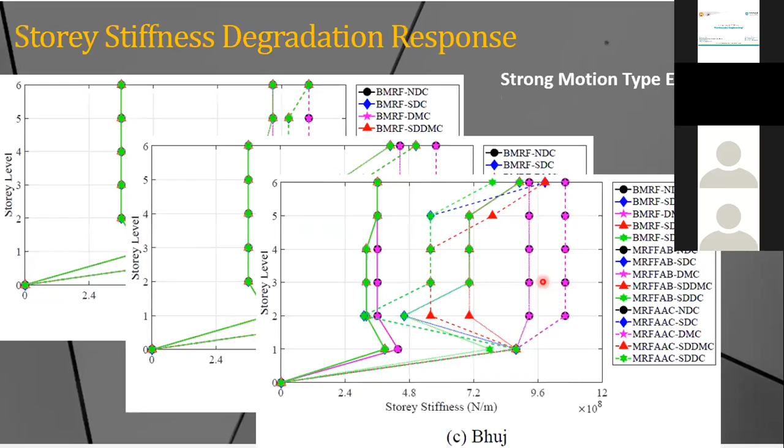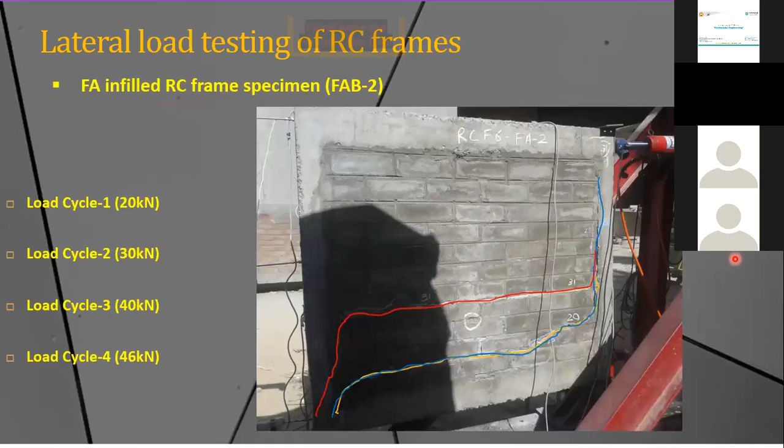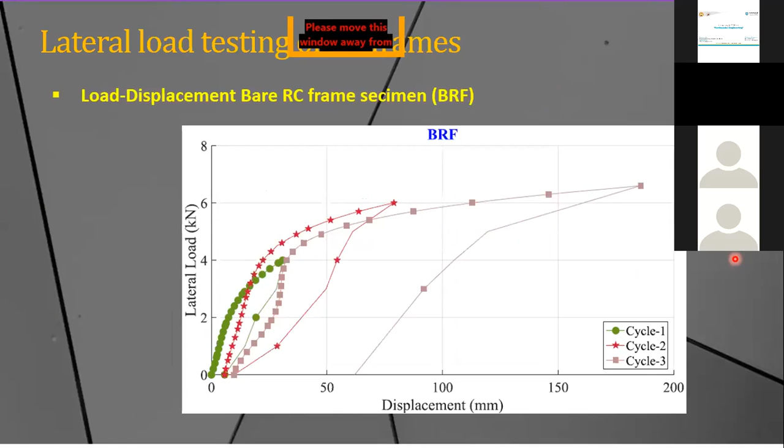Since this is a half cycle, we modified the equation shown earlier with an energy equivalence, for a half cycle based equation. Then we calculated, using numerical integration, the energy stored in the experimental setup through the load versus deformation plot, and equated that energy dissipation for a half cycle with the energy dissipation in a viscous damping element, as given in standardized form.

As you can see here, which I've shown from the book of Chopra, let me go back and show you. So we used the same equation, but modified it because we applied only a half cycle. We modified this equation for a half cycle, and from equating and calculating the area below the curve using numerical integration with this standardized equation.

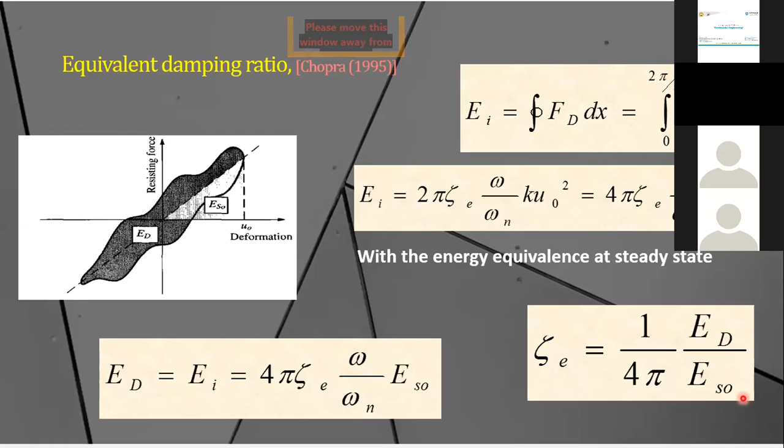By calculating ED and ESO, as you can see in my table, we calculated EI and ESO, and from there calculated a cycle by cycle damping ratio. From there we could find out that with distress and damage, the damping capability of infill or RC frame increases, and found that a typical value of around 2%, 3%, or 4% goes as high as 8% or 10%, which is very similar to the type of work found in literature also.

So I hope I have answered that. So you can very well do that. Yes. So the next question is: briefly explain the numerical modeling part of an RC frame with infill.

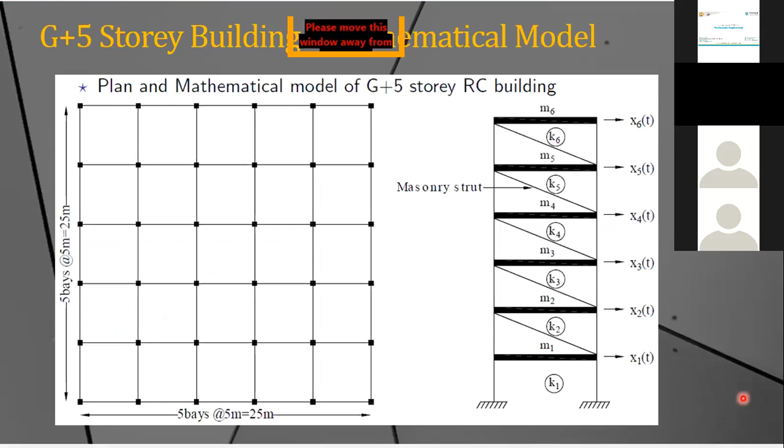In our analysis of that multi-story building, we modeled the infill by a single diagonal strut. There are a number of ways to model it. Number one, you can use a single diagonal strut, and for that you require the geometrical dimensions as well as material properties. So you should carry out an experiment on the material properties you are going to use, whether it's red clay brick, fly ash brick, or AAC block. From there you calculate important properties like modulus of elasticity and strength, and based on that you calculate alpha h.

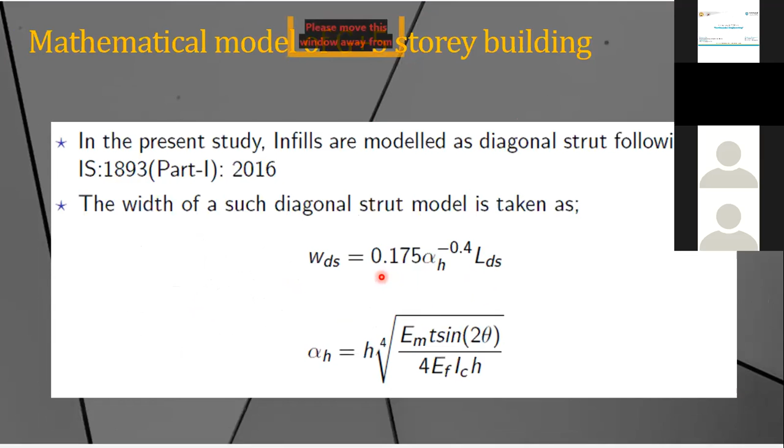You can also use a multiple diagonal strut, for which equations are already available in the literature. A third option, if you want a finite element based solution, is to carry out numerical modeling in Abaqus, or SAP and ETABS. Using SAP and ETABS, you can very well carry out diagonal strut modeling, as that is already available in those software.

If you want to use Abaqus, it also allows you to carry out finite element based analysis, and how to carry out that is given in the literature on hysteresis. So you can model this using commercial software like SAP, ETABS, STAAD Pro, or Abaqus, or you can write your own computer program, as we did in this analysis.

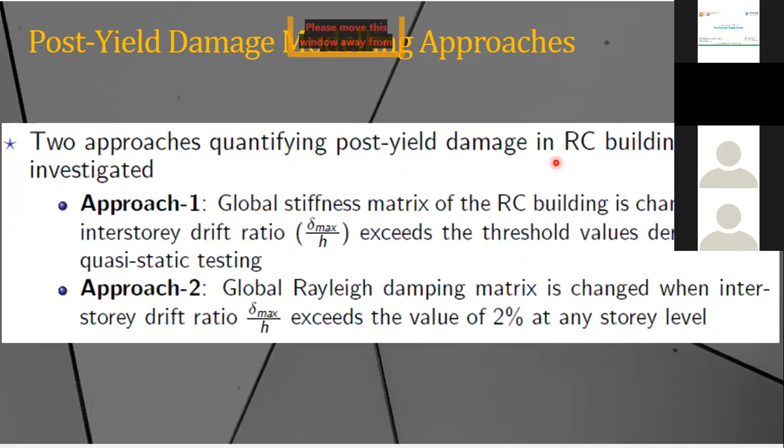We wrote our own computer program from the basic dynamic equilibrium equation. We developed this entire computer program, carried out a lumped mass approach, and wrote our multi-degree of freedom system computer program. We included the stiffness matrices and damping matrices based on the damage, and updated using the Newmark-beta integration method.

That is how you can carry out such numerical modeling, and that is a very standard way of doing it. Of course, you have to look at some good books and literature, and write a computer program yourself — that is the best approach, like what we have done in our case.